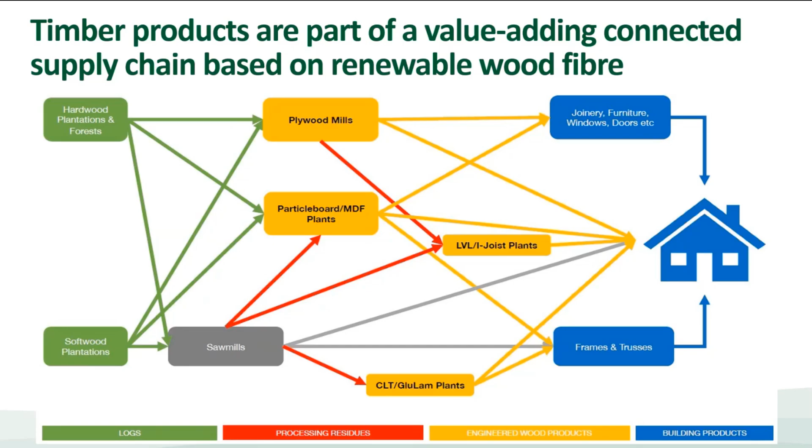our industry. So just a few, Rihanna went through some of these as well, but a few definitions: embodied, upfront and operational carbon, and I'll talk to it later on, but Rihanna's 100% right. Definitions of these types of things and carbon literacy is pretty patchy across consumers, across industry, across pretty much anyone, to be honest. Operational carbon is obviously the emissions produced during the day-to-day use of a building, including heating, cooling, and lighting. So that diagram at the bottom, hopefully you can see it, there's a nice little description of supply chain and then these types of carbon.

Embodied carbon is the emissions carbon footprint associated with the life cycle of the building, including materials, construction processes, end of life. Upfront carbon is the emissions generated during the initial stages of the building's life, including materials sourcing, manufacturing, transportation, and construction. Now, strategies to reduce emissions in the built environment have previously focused on operational emissions, but we obviously need to extend it to include embodied carbon. We would say with an initial focus on upfront carbon and then enabling a circular economy.

Different products across the building industry have different advantages or disadvantages in each of those stages. So it's always an interesting conversation with other building products about which ones we should be looking at and which one should be dealt with first.

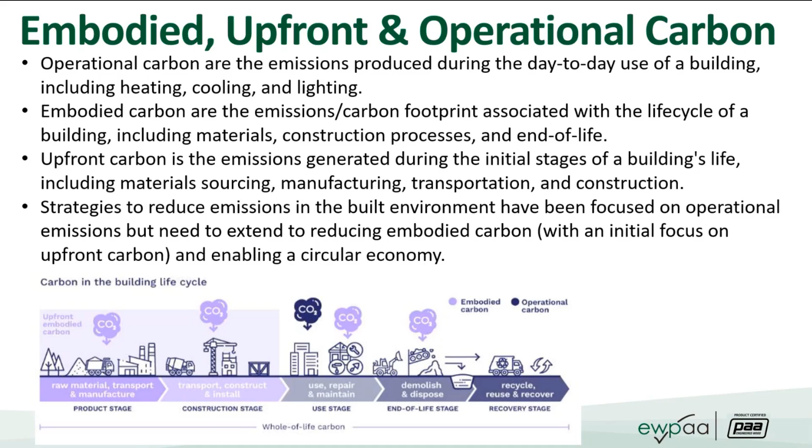All right. Now onto what I wanted to talk about. We have a bunch of these over there, the report, and it's Steps Towards a Greener Future. So this report was released in mid-2024. I'll go into who produced it a little bit later, but I feel, and we feel as a group, that it needs more exposure. There's a heap of good things in there. It's almost too many things, which might be a bit of a problem about how to communicate it, but it's a really good report. So I thought today we could go through and look at some of the aspects of it. It's trying to identify opportunities to reduce emissions in the built environment using low emission products and construction practices.

It was commissioned by the Gippsland Forestry Hub, Frame and Truss Manufacturers Association of Australia, and Kirsten's right in front of us as well, and also the Federal Department of Agriculture, Fisheries and Forestry. Kirsten, if I get any of this wrong, just yell out. The report was prepared by Wood Products Victoria with assistance from ThinkStep ANZ and also Industry Edge, which are, I think, two of the best consultancy firms in this area in Australia.

Now, Wood Products Victoria, I should put my hand up. I'm a director of Wood Products Victoria, and Kirsten is as well. And I'm not just promoting this because I'm a director of Wood Products Victoria. I actually really do think it's a good publication.

Alistair Woodard was the project leader and LCA expert, well known by pretty much everyone here, I'm sure. He retired early in the year, but I really wanted to recognise his contribution. This is just the tip of the iceberg in terms of the types of reports and information he's given to industry over the years. Kudos to Alistair, and yeah, we haven't lost him. He always pops up and he continually emails me, so it's good.

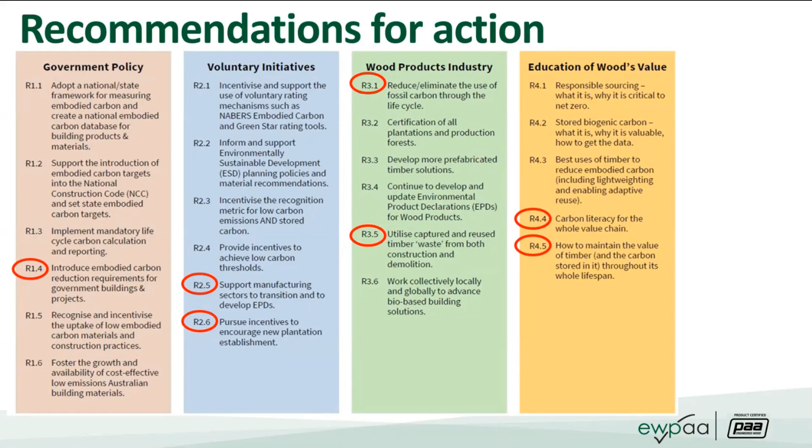So the first one, government action. All levels of government can lead and use their considerable building demand and procurement policies to reward embodied carbon reductions. As we were talking about, even if it makes sense and you've got a passion for it, you need leadership, you need the right settings in government, and demand as well. Maybe exemplar projects that kick these changes off, and the government is set to lead that process.

I'll talk about wood encouragement policies and programs in a second, but examples of potential government actions were included in a recent CEFC report, and I've got a picture of that later on: encourage the use of low embodied materials and products through grants, etc. Use tendering criteria that evaluate and reward low carbon product selection in projects. Require embodied carbon to be measured and reported.

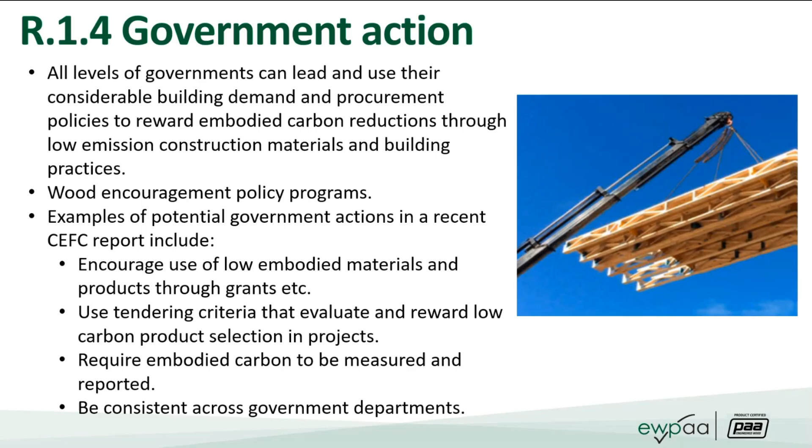We'll talk about it a few times, but if you don't measure it, you can't manage it, and you basically can't adopt it in many ways. So EPDs, all that kind of stuff is part of it. And also be consistent across government departments was another recommendation from the CEFC report. That's the Clean Energy Finance Corporation, if people don't know what that one is.

So moving along, wood encouragement policy. This is not a new thing. It's been taken up by all levels of government, state governments, local councils around Australia. Western Australia and Tasmania have one, and 18 local councils. Wood encouragement policies generally require responsibly sourced wood to be considered when designing a new project. So it's not a you have to, it's a you need to consider. That's the approach that's been taken. And we've been encouraging more and more councils and state governments to continue to do that with their government buildings.

Makes a lot of sense.

All right. So EPDs, recommendation 2.5 in the Greener Future document, is to support manufacturing sectors to transition and develop environmental product declarations to better understand and disclose the embodied carbon of the materials and the products. As I said, in short, if you can't measure it, then you can't manage it or compare it with other alternatives. So hugely important, but also quite complex documents, as we know, and especially they deal with more than just carbon and emissions, water, etc.

Other environmental measures get described in EPDs. And I'll be honest, they're quite expensive to do at the moment, and they also need to be renewed at routine timeframes. So there are some blockages in adopting or producing EPDs: the cost and also the effort to gather that much data, especially for smaller companies or smaller industries.

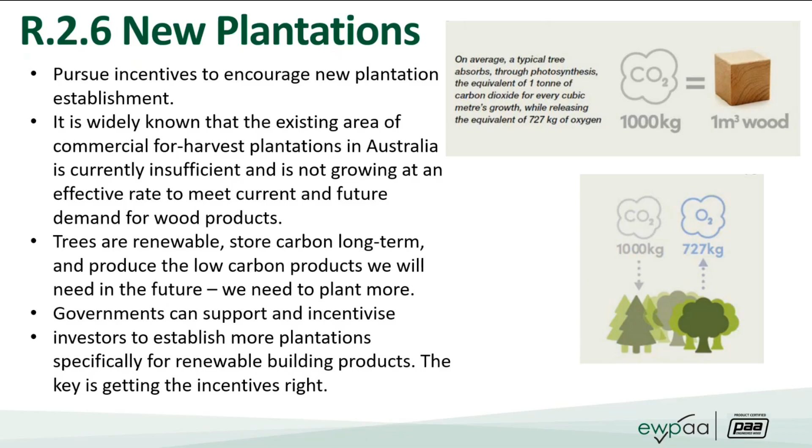All that we're going to talk about at the other end in terms of the building industry needs more fibre at the front end, and more renewable, sustainable fibre where it counts to minimise transport costs, etc. So governments can support and incentivise investors to establish more plantations, specifically for renewable building products. Now, the key is always to get those incentives right. I'm sure Joe will be able to explain more about it as well.

So the next one is around fossil fuel emissions. Pretty obvious, most people in the room would know about it. Our supply chain, the management of plantations, processing logs into wood products, etc., requires the use of energy. Some of that energy is from fossil fuel. Other energy in our industry, fortunately, is biogenic, so residues can be used for heat, and energy can be electricity, industrial heat, or transport fuels.

So we should think more broadly about what our energy needs are in industry. Our industry needs to develop and implement decarbonisation activities to reduce or eliminate the use of fossil fuel carbon in our supply chain. Many people probably don't think we do, but especially for renewable industrial heat, we use a lot of internal wood waste to power our kilns and boilers.

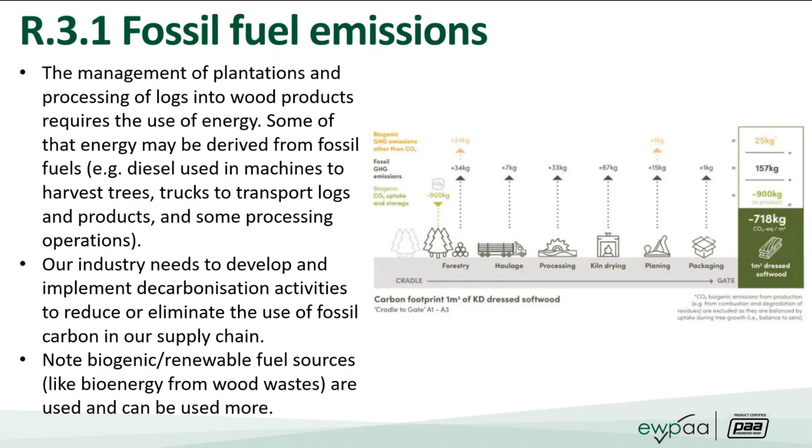An example I've seen over time of the build less, build clever part is using timber solutions on top of existing concrete car parks in cities. Using the existing footprint and the benefits of lightweight timber framing solutions to provide housing, but reusing what we've already got in terms of footprint. Those kinds of things make a fair bit of sense.

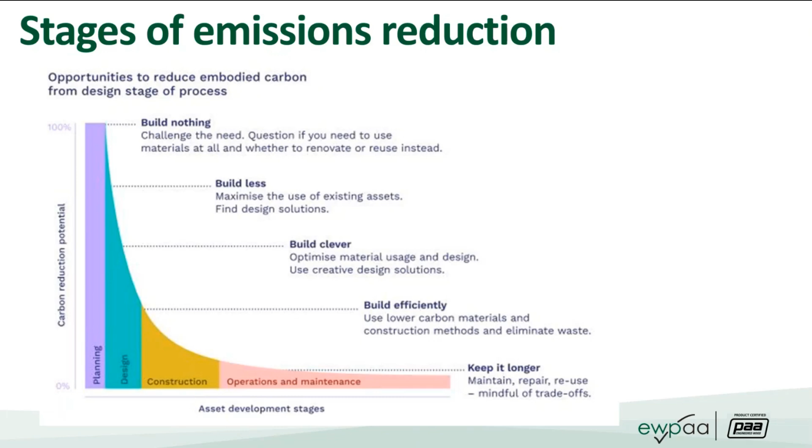Build efficiently and keep it longer. All great principles, and some harder than others to actually engage with. You're probably seeing I'm throwing a whole bunch of ideas up against the wall, using the steps towards a greener future as a sort of framework, but hopefully some of these might stick in people's minds.

We're having the conversations around the table and we can get a few projects out of them, Benoit.

Circular economy, end of life. I'm not going to steal Penny's thunder, but I will say that the definition of a circular economy is an economic system aimed at eliminating waste and continual use of resources. Circular systems employ reuse, repair, remake, and recycle to make a closed-loop system.

So that's the idea. Some of the potential output solutions include minimise actual product use, implement design for deconstruction principles, so reuse, use the most efficient processes to maximise product use, and then use any unavoidable waste as a feedstock for another process.

So whenever we talk about circular economy, and Penny does it all the time, we're not talking waste, we're talking products in many ways. It may not be a valuable product yet, but it could be in the future. So let's try to scratch the word waste out of our vocabulary, I think. So things including other products like we saw particle board and also bioenergy as an output.

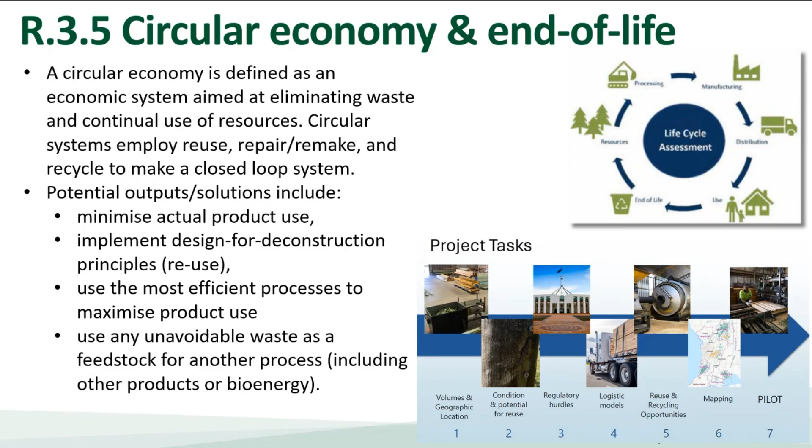Back to Rhianna's point earlier is carbon literacy, and the more you look at this area, the more it's pretty obvious that it's not a simple communication. Some of these ideas are quite complex. To be honest, how many times we as an industry have failed to simply convey ideas, facts that we know are true and we've got a passion for, but we haven't found the best way to get them into the supply chain or consumers, like sustainability as a notion, etc.

So we really need to do a fair bit of work in carbon literacy as governments, industries and public are trying to understand what the bits of this complex topic are and how it might be achieved, the emissions reduction in our building industry. So there's a desperate need for a higher level of literacy and understanding of the concepts and details.

So just a few examples, and they've been outlined in the report as well, but FWPA, so Forest Wood Products Australia, has an ultimate renewable program, which I think is a consumer-based program. It's a really good program. And there's a few carbon and net zero related publications like a carbon glossary and primer, Australia's carbon balance, the role of wood products in zero carbon buildings. So if we need to communicate those kind of things, we really need to grab these song sheets so that all of industry can actually have the same discussion rather than different ones.

Another initiative is right in front of me, it's glaring me in the face, is Kirsten's Carbon Warrior program, which advocates for Australian government policies and regulations promoting the use of renewable materials to assist the built environment, lower the impact on climate change. So exactly what we're talking about today. And it's been pretty popular, actually.

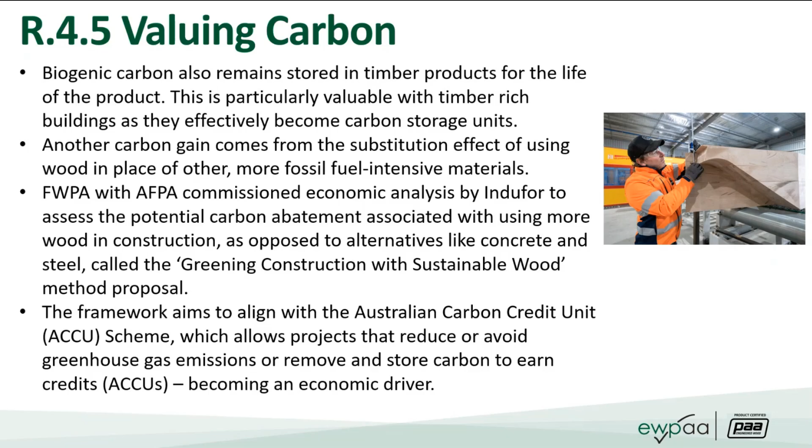And hopefully I've thrown enough stuff on the wall to catch some ideas out there. Thank you.